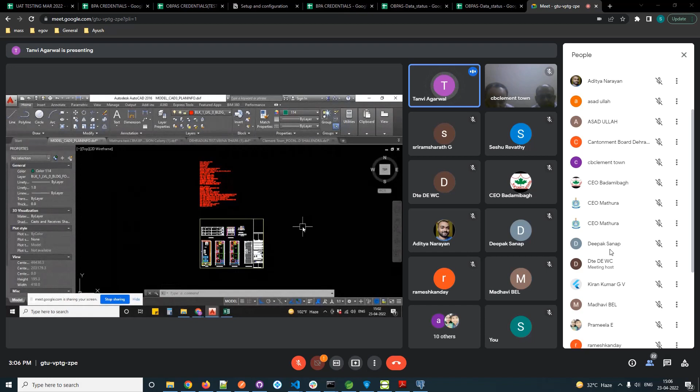They need to show only this much information while they upload their final updated drawing onto the portal. It will have the plan information layer updated as per the specific details of their plot and their particular drawing, in which all the layers which need to be updated as per the given or shared DXF template with them should be there only, and they'll remove anything else in the drawing.

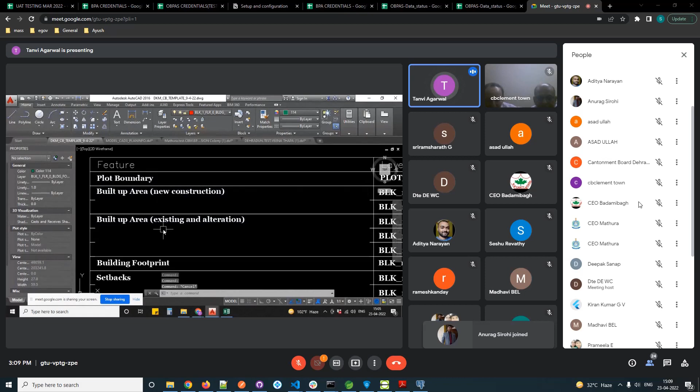So this is the template of layers being shared with the CBs, in which we have different layers, for example plot boundary, built up area, new construction, and built up area which is already existing, or any alterations or deductions in your proposed building, then you'll use these layers. Some are mandatory layers which you have to prepare onto your drawing.

For example, you will take a drawing, whatever drawing you prepared, the method you prepare your drawing would be the same. After you prepare your drawing, you just make sure that all the layers of your drawing are in the zeroth layer. You just make sure. Now onto this layer you will overlap

the new polylines or the rectangles. It should be an enclosed polyline only. For example, if this is the plot boundary, we'll draw it on the site plan. If we'll see here on the site plan, the first layer sequence would be to show the plot boundary onto the site plan.

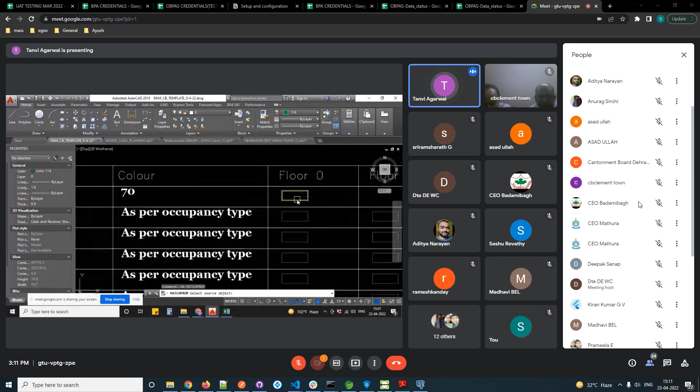Now this is in a layer, it can be any layer. So we'll ensure that we'll make the zero layer as our current layer. We'll draw everything in the zeroth layer. And then we'll match the properties of this layer with our portal layers. So for example, plot boundary, plot underscore boundary is the layer name.

It is in color 70. And for floor 0, that is ground floor, this has already been created for your assistance. You'll just have to match its properties, MA, enter. You'll just have to match its properties with the polyline of the plot boundary you have just created. So now it comes under the layer called plot boundary.

Similarly, we'll make another mandatory layer. This is the mandatory layer. If we'll see in this table, this is the mandatory layer which we have to show in order to get passed through the portal scrutiny itself. If you will not create this layer, the portal will reject the drawing.

Similarly, the other layers, for example the built-up area layers, it is also mandatory to show the built-up area layer, whatever are the deductions, whatever is the new proposed built-up area, whatever is existing, or the demolished part. We have created some separate layers for it. Floor-wise, you have to choose the layers carefully as per the floor.

Now, the next layer after plot boundary would be your built up area and the building footprint. For building footprint, if you see, the layer name is block n level 0 building foot underscore print. So you need to ensure that you are matching the properties of the correct layer with your plan. We have seen some CBs matching it with a different layer, wherein in other layers we have FLR, and in this particular layer we have LVL.

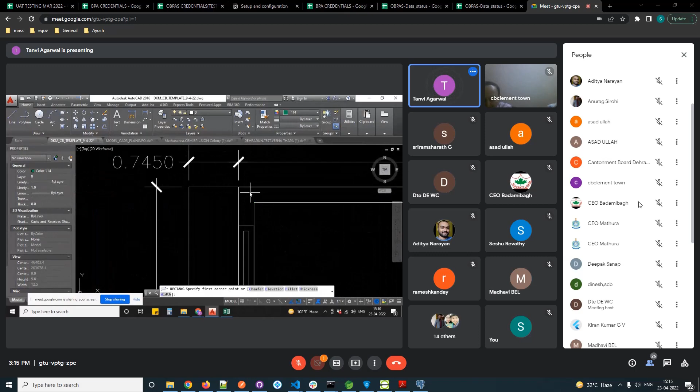Similarly, we have built up area. For built up area, we'll create similar rectangles, and we'll show these on the floor plans itself, because we need to show whatever built up area is there on each floor. So if this is the built up area on ground floor, I need to match it with this layer called block 1 floor 0 built up area, and I will match this layer with this polyline.

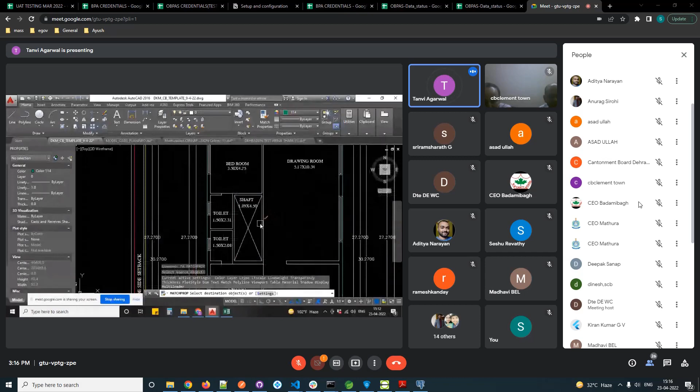Now I need to create the voids or the shafts that I need to deduct from this built up area. There can be multiple voids in the same building block, multiple shafts as well, or open inner courtyards. If we want to deduct them, we'll match its layer with the next layer called block n floor built up area deduct. Because we are working on the ground floor, we'll match it with this layer under floor 0, and we'll match the properties of the polyline of the shaft we just created.

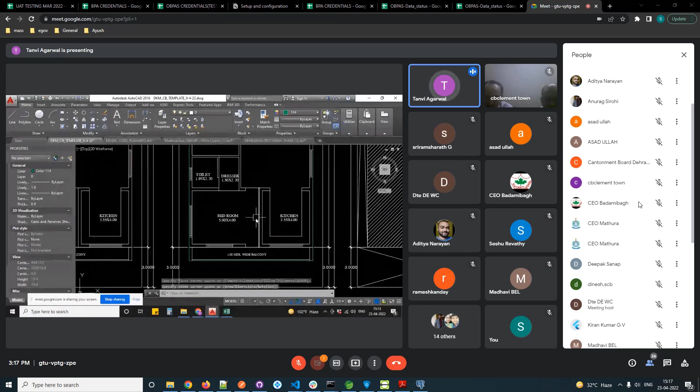Now the outer rectangle we just drew for the total built up area comes under layer block 1 floor 0 built up area - we see this in the properties layer name. The inner void that we created shows in the layer block 1 floor 0 built up area underscore deduct. After creating these two layers, the portal will automatically read the total built up area on the ground floor. Similarly, we will create other closed polylines on other floors, and match its layer properties with floor 1, because now we are working on the first floor plan.

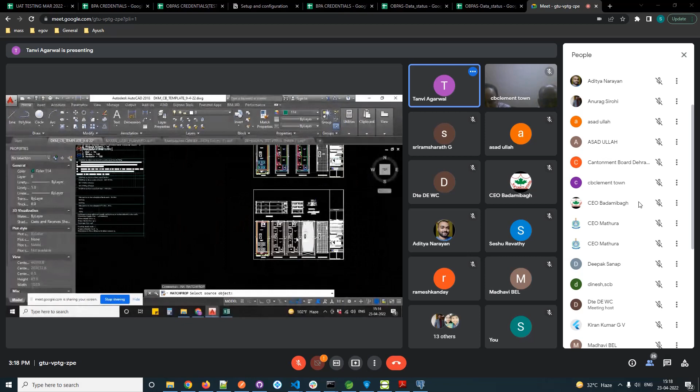Similarly, we'll create the polyline for the shaft, and match the layer for block n floor 1 built up area deduct, matching the deduction layer from the floor 1 column itself, because now we are working on the first floor's built up area. Now this shows under block 1 floor 1 built up area deduct, and this outer rectangle shows under block 1 floor 1 built up area.

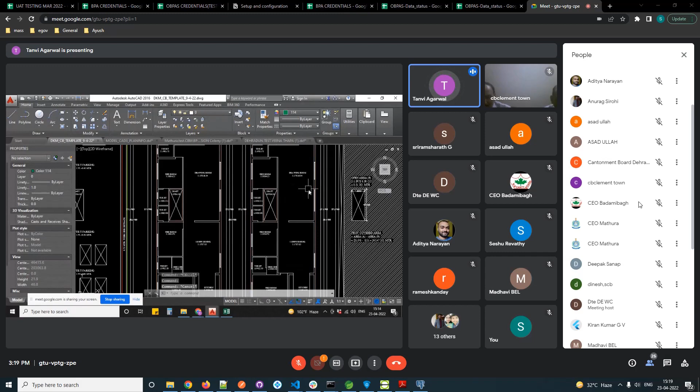So if you are, by chance, showing two separate blocks on the same site, you will create separate layers for the built up area of the different building. For example, this layer says block 1 floor 1 built up area, because it's the first block - only one block we have created on this site, so we use the block 1 layer. If we have another block as well, we'll create a new layer called block 2, floor whatever it is, built up area. This is how we need to create more layers if we are planning to propose more buildings or more floors.

For now, we have already shown the layers for four floors and two basement levels. Mostly in the CBs, we are allowed to have G+2, only 3 floors are allowed generally. So if needed, and as per the CBs, if it is allowed, we need to create more layers and more block layers - we just need to duplicate the layer and change its name.

Okay sir, is there any doubt till now in these 3 layers?

No doubt, sir. Clear, sir. Hello, sir, we're here from Badami Bagh. Hello? Yes, sir. Ma'am, I have something to ask. Yes, sir, please.

Can you please open the drawing from Dehradun area? It's by the name of Veena Thapa, the fourth tab. Yes, sir.

Ma'am, actually first of all I need to ask that the staircase area that I have marked, is it correct or not? So the staircase area you have marked incompletely.

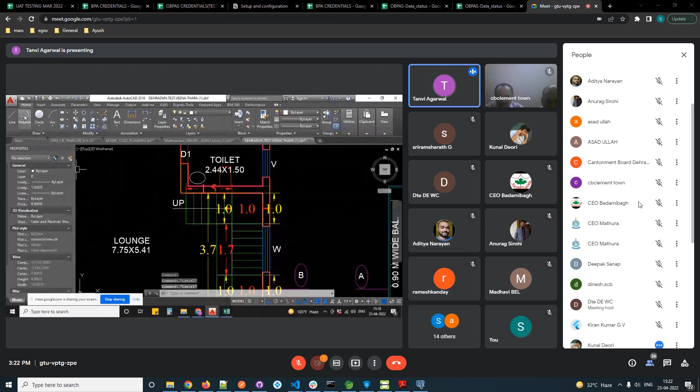So how should I mark it? If you see the last video shared with you, we already discussed how the rectangles should be marked. First of all, the complete area in the polyline of the staircase, we'll mark that. For example, like this, we'll not duplicate any layers, any portal layers. We will not duplicate because it will be counted twice otherwise.

So we'll just mark once this particular layer, and we'll match it with this layer called this block and floor 1 staircase. So if we are working on the ground floor, we'll match it with this layer under floor 0. If we are working on first floor, then we'll match it with floor 1, and so on.

Then the second thing, if you see in this template itself, it explains what you are expected to do with that particular layer. So the polyline showing the staircase area, you need to show in this layer in color 7. In the same layer in color 3, you will show the lines showing the number of risers, which you have shown, I guess. Yes, right.

This is also floor wise. You will show the risers in the floor wise layers. Then in color 2, you will show the dimension with color code 2 as width, and in color code 1, you will show the dimension with color code 1 as length.

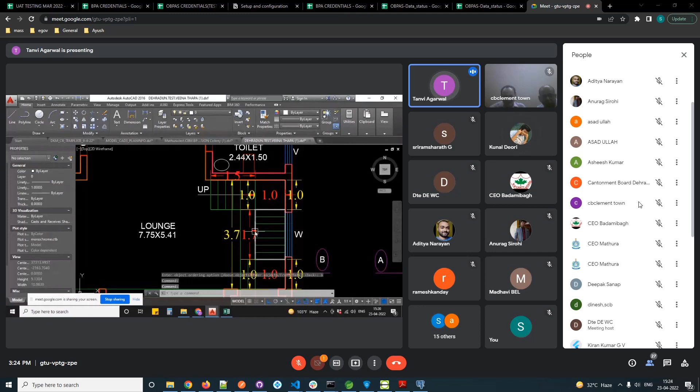The flight, right. Actually, I have also 3 flights in this day. Each flight you need to show the dimension, and each landing you show the dimension in a different layer, as shown over here. Okay.

Also, you need to specify if it is a fire staircase or general staircase. If in your CB's specific bylaws it is mandatory to show a fire staircase in your building, then you will show the same staircase in the same layers under fire staircase layers. Otherwise the portal will show a query that you haven't shown any fire staircase.

So if it is a general staircase only, then you will use this layer format. Otherwise, you will use the fire staircase format if you are willing to show it as a fire staircase. Also in fire staircase, you must have entrance or exit directly to the ground level, like outside the building. Only then it's a fire staircase, right?

So whatever specifications are there for fire staircase, you need to follow it, and you need to create it under these layers of fire staircase only. In case it is a spiral staircase, then you will use this layer to show the outer spiral area of the staircase, just to show that it is a spiral staircase.

And you will just see the comments in the row adjacent to it, circle showing the spiral staircase if applicable as per design. This is not mandatory that you have a spiral staircase in every plan.

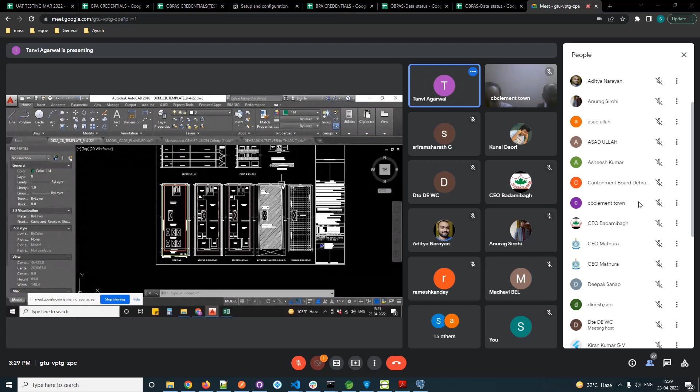We don't have to mark the roof plan. If you mark the roof plan under some other floor level, it will be read as a separate floor. So just keep it in the 0th layer itself, because it will be useful for manual scrutiny later on. For portal scrutiny, there's no need, because CB bylaws don't specify anything about your terrace area, so the portal will not scrutinize the terrace.

One more thing I need to ask — the complete drawing should be in the 0th layer only. The projection which we are taking on ground floor, I have marked it in the chhajja layer, I guess. If it is an accessible projection, then you will mark it in the balcony layer. If it is inaccessible, then in the chhajja layer.

If it's a canopy on the door lintel or anything, if it is accessible, then I have to mark it in the balcony layer. And it will be marked in zero floor only. The ground floor will be marked in zero floor, and the first floor will be marked in floor one, according to the table. So for ground floor, there will be no balcony.

For ground floor, it would be a platform or a chabutra sort of thing, not a balcony. If you are showing a balcony on first floor, you'll show it in the first floor layer, because if you are constructing the balcony on first floor, you will show it on first floor. On ground floor, you will show it if you are showing a chabutra below the balcony.

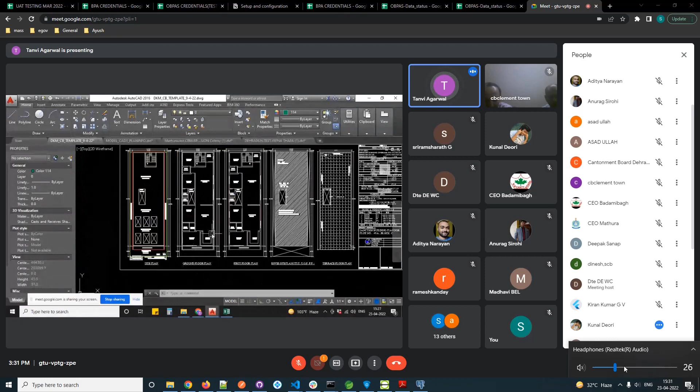The projection does not need to be shown on ground floor. The dotted things, whatever dotted lines we used to show on ground floor, you may mark in the zero layer if you want to. All the dotted things you will mark in the zero layer, but not in the portal.

Got it, thank you. But the portal layers you'll use very specifically, because the layers of the enclosed polylines will be helpful for the portal to count the total area on that floor.

Please explain about how to mark the direction north and match it with the layer.

Sir, in direction north, that needs to be checked manually. So what we were planning was to have a polyline to show the north direction from the CVs, but the portal will not be able to check it manually. So what we thought later on is to drop the portal layer, show it on the zeroth layer, and it would be checked manually later on. Otherwise, you can just show the polyline showing the north.

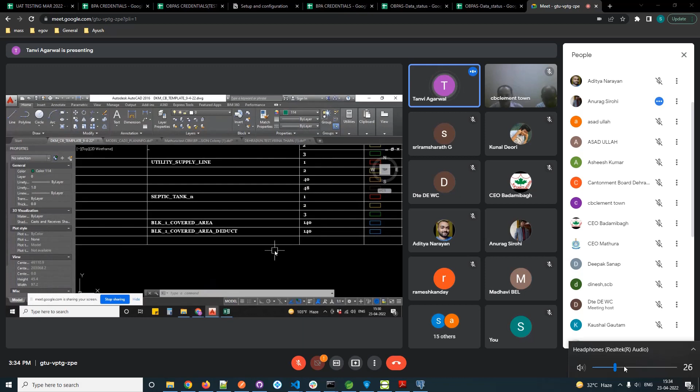Okay, so sir, you'll get a layer called north direction also in the template shared with you, which I'll just share the updated one. So you'll get a layer called north_direction, wherein you can show just the polyline. For example, if this is my north, I can just show a polyline showing the direction of my north like this, and I'll match this with the property of that particular layer, which you'll get now in the updated template.

Okay sir, and ma'am, what about electrical line and plumbing line? So electrical and plumbing, we already have the layers. For example, under utility supply line, we have these lines: electrical supply line, which is mandatory and needs to be shown in color 1; water supply line under color 2; water drain line color 40; and sewerage line color 48. These are the layers, and these you have to show only onto the site plan like this.

In this case, we have found an error point mentioning that the well was not defined in the drawing. So what was that? Well, you don't need to, that is not mandatory. Actually, the wells were from an outdated building bylaw, and it was decided with the CBs in the meeting that we were omitting that particular bylaw. So if you have that, you can show it in the zeroth layer itself. If you don't have it, it's not mandatory to show, because this has been omitted.

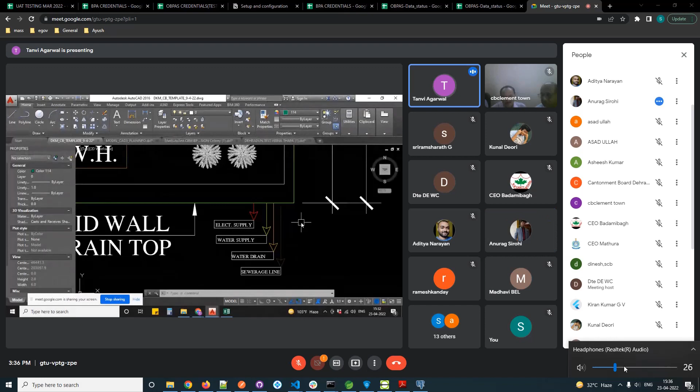Ramp, main gate, boundary walls, these are not given in the latest one. Ramp, because ramps are not being asked for in your CB bylaws, sir. So whatever is applicable as per your CB bylaws and your project, only those layers you need to update your drawings with, along with some mandatory layers, whatever your CB is, whatever your land use is. Only those you need to select.

Tanvi, any other doubts? I have a question. Yeah sure, please go ahead. Can we have this scrutiny verification ourselves?

I didn't get your question, sir. Ourselves, as in?

I have got the application and login details where I can upload the DXF file and view the EDCR report, but I am not able to upload it. It's showing some error.

If it is less than 30 MB, I hope it will not show the error. No, it is less than that and still showing an error by the name 404. Every time I'm uploading the file, it's showing some error.

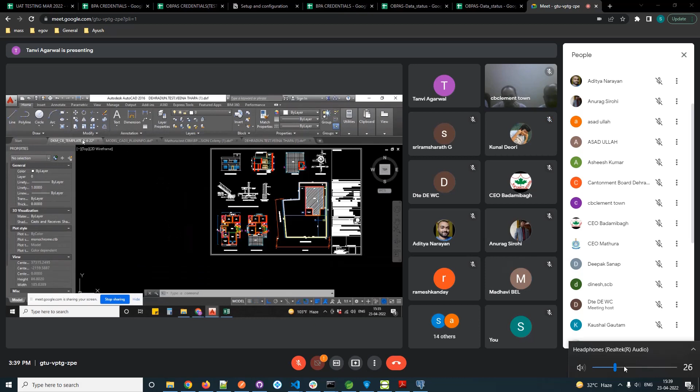Okay, so I hope till these three layers we are clear by now. We have covered the plot boundary layer, built up area layer, and building footprint layer. If we have anything we want to show under existing built up area, we'll show these layers: built up area existing, built up area existing underscore deduct, similarly as we were showing the proposed new built up area and built up area deduct.

Similarly, we'll use this built up area existing and built up area existing deduct layer. In case we are demolishing some part of already existing built up area, we'll show it in this last particular layer, floor wise itself.

Then the fourth layer comes setback, which is again a mandatory layer, and as per your CB bylaws, whatever minimum setbacks are specified, you will follow them only. All four side setbacks need to be shown onto your drawings.

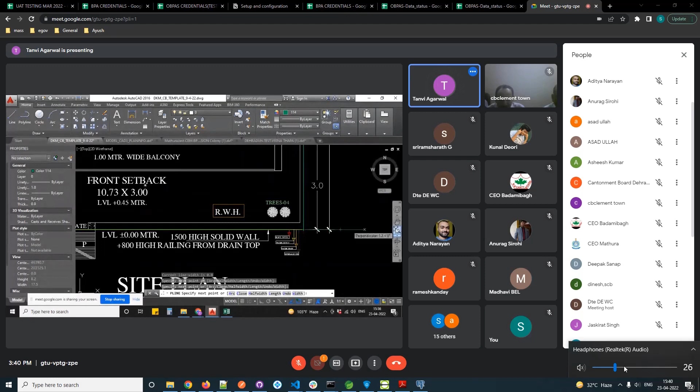For example, for front setback, we'll take the rectangle, or else we'll take the polyline and create an enclosed polyline. One thing: while creating the setback, we need to ensure that it touches one side to our plot boundary and the other side to our building footprint layer.

Only then it will be able to capture the correct setback area. So this enclosed polyline is touching the building footprint layer on one side and the plot boundary layer on the other side, so now it will take the correct area of the front setback.

Now we'll match its properties with the front setback layer, which is shown in color yellow, color 2.

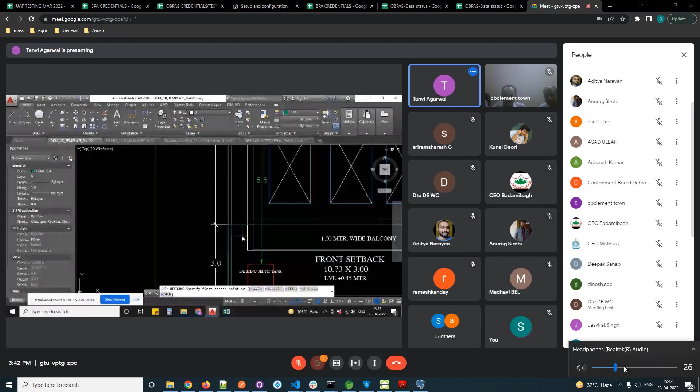Another rectangle will be created for the side setback or rear setback and for side 2 setback, and we'll match it with the respective setback layers. For front setback we have this yellow one.

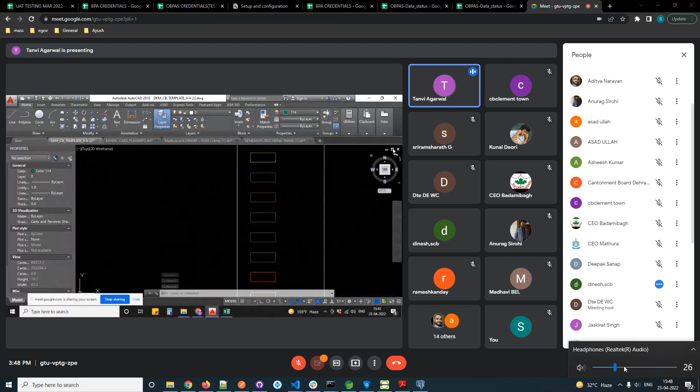I'll go to the layer properties. If it is block 2, then I'll create a separate layer and the name would be block 2 floor 0 built-up area. So in that manner, I have to create new layers on the basis of these already created layers for the floor.

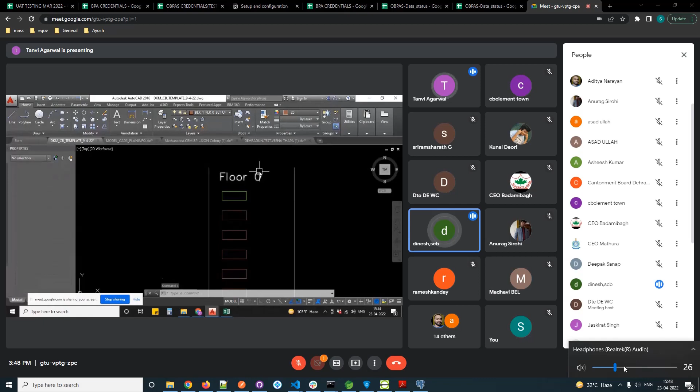We can change the color of that block. You can change the color, but you'll have to maintain the color specified in this table. That is why the color is being specified over here, so that by mistake you don't change it.

For example, if the portal takes it in color 1 and you change the color of this layer to some other color, the portal will not accept it. So that is why the color is being written over here, to ensure that this particular color is the color of the layer which is desired by the portal.

That means every polyline has to be closed, or else it would not take the area. If it is not an enclosed polyline, the portal will not read the area.

Madam, in our cantonment board, stilt floor is also allowed actually. There is a separate layer for stilt floor, madam. So, sir, stilt you will create in floor 0 only. Stilt you will create in floor 0, and the floor above the stilt you will create in floor 1.

You can create it separately, the portal reads it that way. That is only for car parking purpose, madam - no issues, sir, that is exempted. But the portal reads it, that layer is exempted in the FSI.

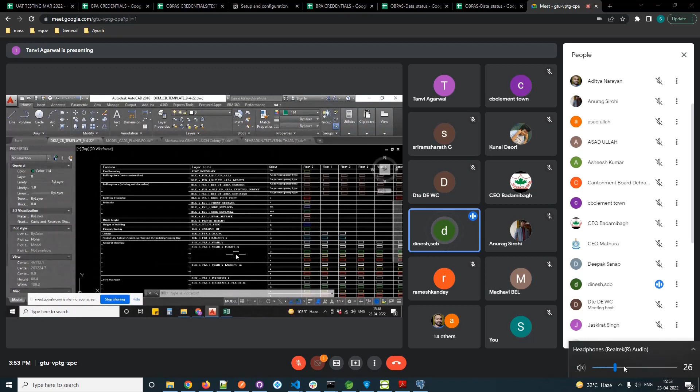Okay, madam. One more point, madam. In the first floor area, there will be projections, that means balcony projections. In the ground floor, there won't be any projections. That means in the ground floor, on one particular area, if there is a setback of 5 feet, and if it comes to the first floor, there will be a 3 feet balcony projection available. At that area, only 2 feet setback remains - that means 2 feet running space only, open to sky only, madam.

Then what should be the setback? So let me tell you, in the site plan, we'll show the total setback area from the plot boundary line on one side to the building footprint line on the other side. So it will touch the building footprint. If the balcony is on the upper floor, you have shown it in the 0th layer only, so the portal will not read it.

So balcony in the site plan, you're showing it in the 0th layer. Then on the site plan, you will show building footprint, plot boundary, and the setback line, overlapping the building footprint line and the plot boundary line. So this will create your front setback or all the setbacks like this only. That means the balcony comes, and the setbacks available in the ground floor are only reflected for first, second, and the remaining floors. So you are telling the same, madam?

Sorry sir, what are you saying? Can you please repeat? The setbacks available in the ground floor only reflect in the first floor and second floor - are you telling that, madam? That means if the setback in the ground floor is 5 feet, the setback will be shown only on the site plan, not on the floor plan. So for the first floor and second floor, we don't have any setback criteria, right? We have the setback criteria in the site plan itself, right?

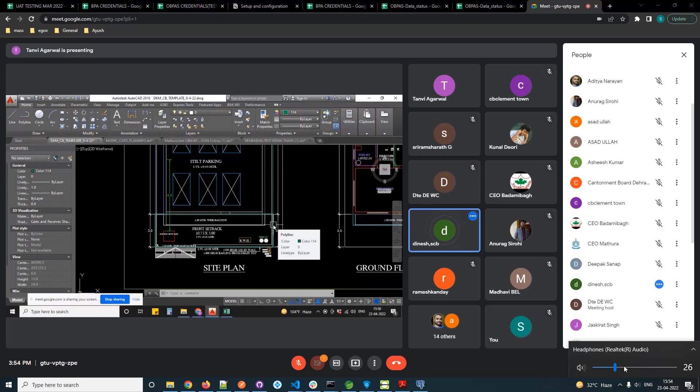Alright, if in case we have the balcony, we'll show it on the first floor if we have the balcony or any projection. If we have an accessible projection, we'll create it under the layer called floor 1 balcony.

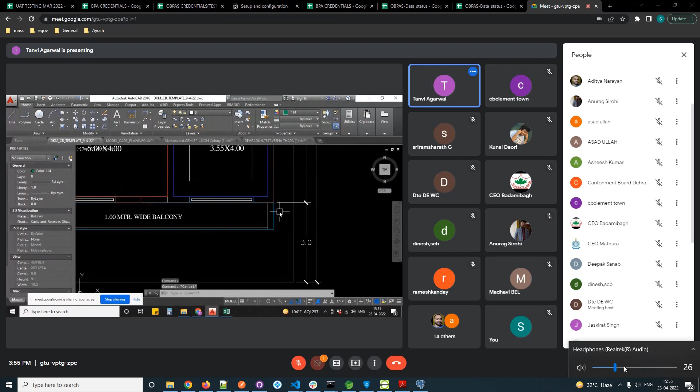If it is an inaccessible projection, we'll show it under the layer called chhajja, block N floor I chhajja. If it is accessible, then block N floor I balcony. So on the first floor, if we have the balcony, we'll show it on the first floor plan itself. On ground floor, we'll show it only if we have any plinth or chabutra just below the balcony, and only if we are building anything on the ground floor. Whatever built up is there on whichever floor, we'll use the layer of that floor only, so we'll not create the layer twice for the single balcony.

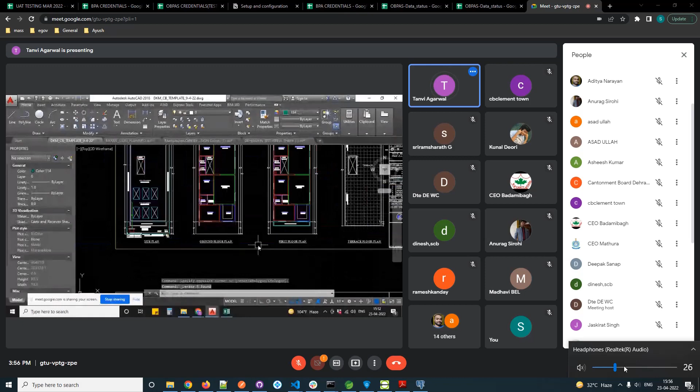If we have just one balcony on the first floor, we'll just show the balcony on first floor itself. So here we have the layer called block 1 floor 1 balcony 1. On ground floor, because we have the chabutra within the setback, here we are saying block 1 floor 0 balcony 1. If we are not having any chabutra or plinth on the ground floor, we will not show this layer on the ground floor, we'll just show it on the first floor like this.

Okay sir. Have I answered your question, ma'am? Yes sir. Any further doubt on this, madam?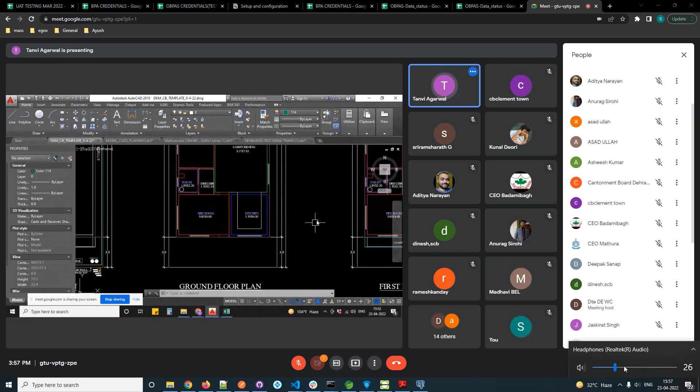Generally, we show the dotted line for balcony projection on the ground floor, madam. Is that possible? Dotted line we can show under the 0th layer, but not on the portal layers. Because anything in the 0th layer you want to show, you can show it, it will be checked manually. But in the portal layer, if you show it twice on the drawing, it will be counted twice. Okay, understood, madam.

So staircase we have already talked about. If there is any doubt in staircase till now, you may please let me know. So we have covered till now plot boundary, built up area, building footprint, setbacks, chhajja projection, balcony, and the staircase.

Now the plinth height. To show the plinth height, we have a separate layer in color 7. To show the building height, we have a separate layer in color 5. And to show the parapet height, we have a separate layer in color 3. In the elevation or the section, we'll show them just one single time, we'll not show it again and again, otherwise the portal will read it twice or thrice. So this particular layer, block 1 height of the building, the total height of the building will be shown in this particular layer.

Then here we have the floor height layer, block 1 floor 0 floor height. So for each floor we have defined a different layer. Block 1 floor 1 floor height is this, and this is a different layer, block 1 floor 2 floor height. So the color would be the same, but the layer would be different.

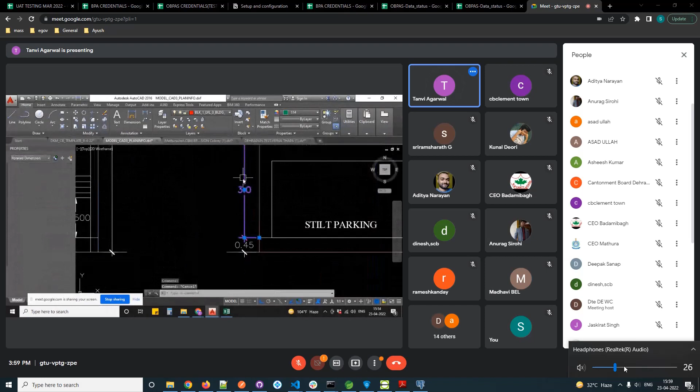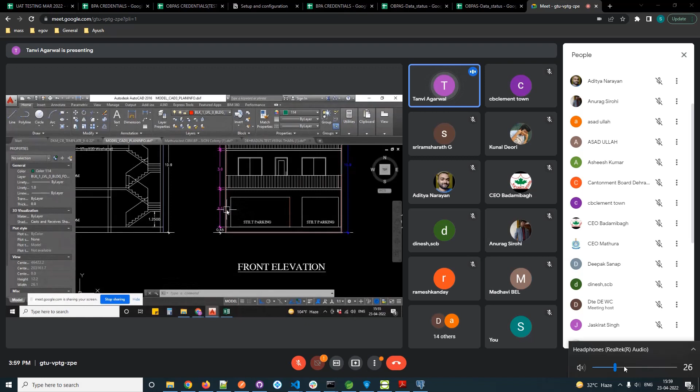In this particular layer, we need to show the clear height of the floor from the floor finish to the bottom of ceiling, so that it will validate that particular bylaw wherein the height of your room should be minimum 3 meters or whatever that bylaw says. So you will mark the dimension to show the clear height floor wise, selecting block 1 floor 0 floor height, then block 1 floor 1 floor height, then block 1 floor 2 floor height, showing the clear floor height from floor finish to bottom of ceiling.

Okay sir. And along with the staircase, we'll mark floor height M equal to whatever is the height of the floor, from floor finish of the lower floor to the floor finish of the upper floor, landing of the lower floor to the landing of the upper floor. Okay sir, so this would be different.

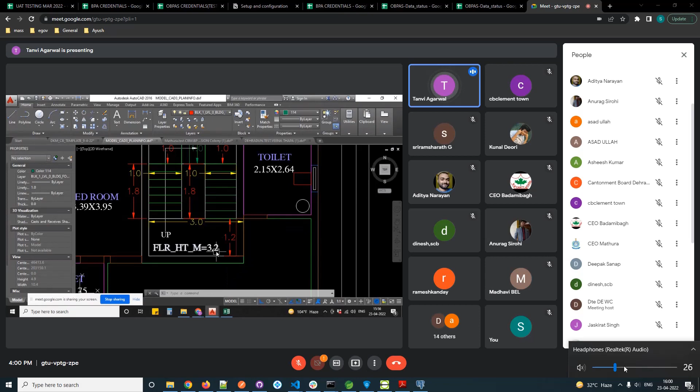The floor height underscore M over here means the dimension in meters. So we'll have to write the total floor finish to floor finish height over here in meters. So this would be 3.2 for example here, and this clear height would be 3 meters only, because this is from floor finish to the bottom of the ceiling, and that is from floor finish to floor finish of the 2 subsequent floors.

Right madam? Sorry, staircase headroom, madam. You have to show on terrace floor staircase headroom height, overhead tank height, and lift room height.

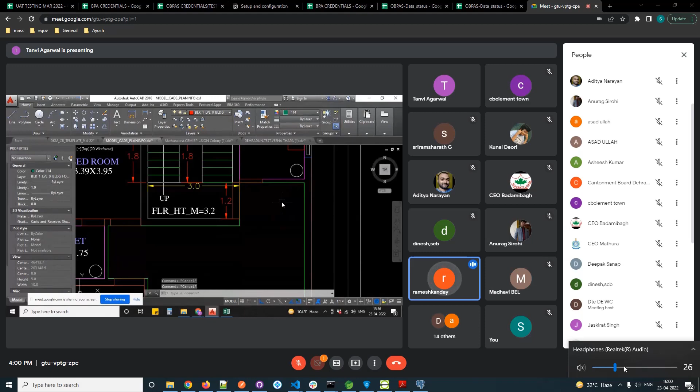Sir, can you show headroom in the staircase, please? So, headroom actually is not being specified in the CB bylaws. So that can be checked manually onto your drawing. You can show it in the 0th layer only. Okay, madam. Right, okay, sir.

So whatever is applicable as per your bylaws only, that you need to show into these defined layers. Otherwise, all the other information you want to show, you can show it in the 0th layer to be checked manually further. Okay, so any doubt till now? We have covered all the layers till the staircase till now.

Floor height we have already covered over here. So whatever floor height we are showing in the elevation or the section, that would be the clear floor height, and the layer will be different, but the color would be the same.

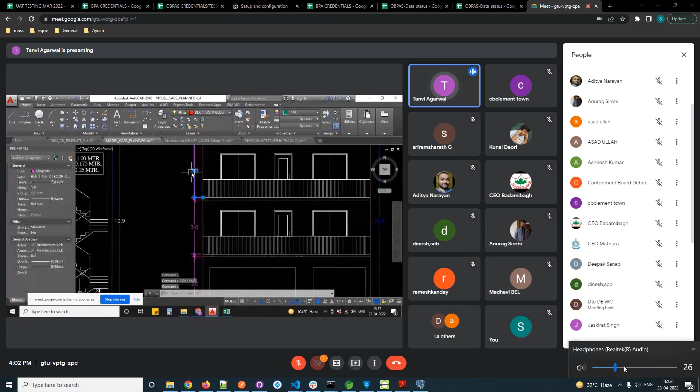Along with the staircase, we'll show the floor finish to floor finish height, and that would be in the layer block 1, floor 0, stair 1 itself, the same layer where we are preparing the polyline for the staircase. The layer name is block N, floor I, stair K, whatever staircase it is, and the polyline goes in this layer. We'll show the M text like this, simply writing FLR_HT_M equals whatever is the floor finish to floor finish height in meters.

Okay, then moving on to the next layer, we have the habitable rooms. In habitable room, the layer name is block N, floor I, regular room. In the regular room, we have specific colors as per the type of room. If it is a simple bedroom, we'll show it in color 1. If it is a bedroom with attached bathroom, color 2. Drawing room, color 3. If it's a toilet or bathroom, color 6.

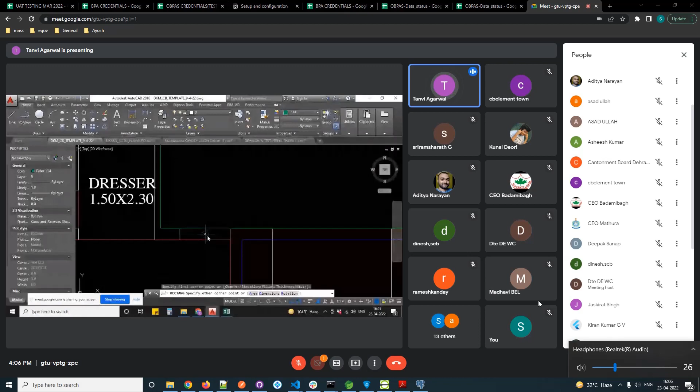For whatever floor plan we are working on, we need to work accordingly. For example, if I want to show the door, I'll go to the ground floor plan, take this rectangle, show the door opening, and match the door layer on the ground floor with this. Now it comes under block 1, floor 0, light ventilation, and the color already specifies that it is under the door layer.

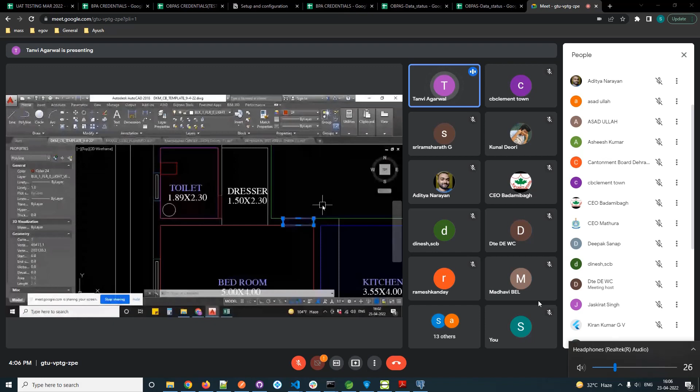Similarly, for windows, I'll mark another polyline to show it, and the portal itself will read the width of the window like this. I'll now match it with the layer on the ground floor for windows. Like this, for all the windows on the same floor.

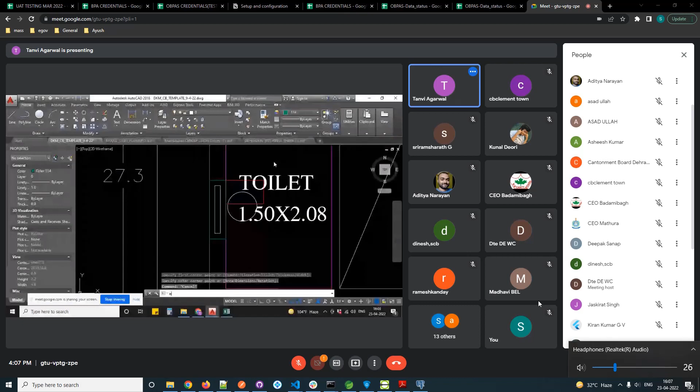Now for the ventilators, I'll similarly draw the polyline like this for all the ventilators on the same floor, and I'll match the layer of ventilator, which is color 150, with the polyline I just created for all the ventilators. So this is how openings will be created.

So, habitable room and openings, I hope it is clear. If it is not, you may please ask the doubt.

Okay, so is it clear, sir? Yes, ma'am. Madam, drawing with the interior specified color. If you draw with that specified color given by you, will the area be taken automatically, madam, in the portal? Or do we have to type that area? The portal will read it automatically.

If you will create it in the correct layer under the correct color, the portal will read it automatically. That means we have to first select the layer, and later we have to draw that one, like that, madam?

First, you have to draw the polyline onto your plan, and all the polylines will overlap each other. All the polylines will overlap your already prepared drawing in the 0th layer. For all these portal layers, you will overlap new rectangles or new polylines over it, and you will match the property of the desired layer as per the portal template.

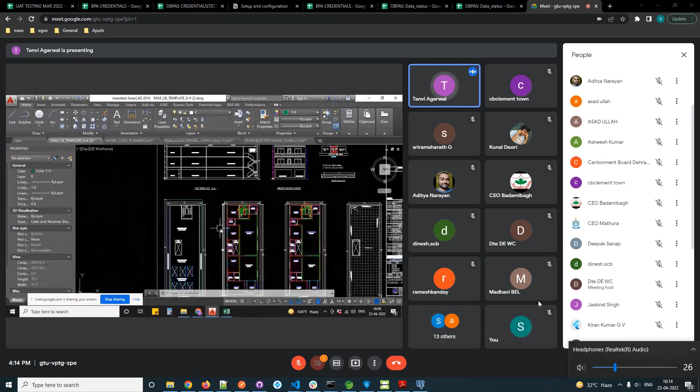Then the wash basin, WC, urinals, bath and toilets - these we need to show as polylines as per the specified colors over here. For example, for WCs, we have marked this kind of polyline.

If you see the name of the layer in the properties, it's block 1, floor 0, water closet. So all the WCs will be on the same floor, on the same layer, like this. Then if I select the wash basins, all the wash basins on the same floor will be on the same layer.

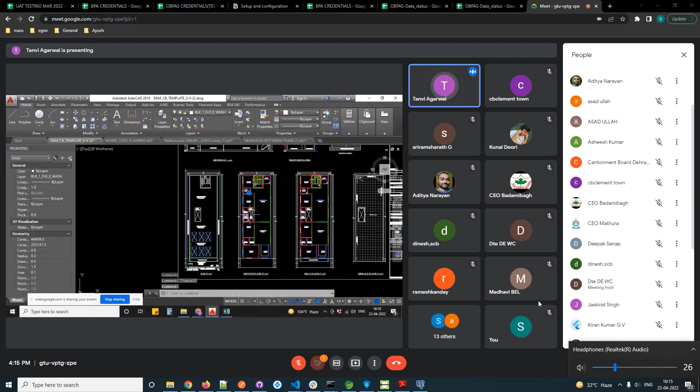Or all the wash basins of the same type will be on the same layer. If we have different types of wash basins or sanitary fixtures, then we have different layers for each type. Generally we have a similar type of WC or wash basin, so we draw all those similar type sanitary fixtures onto a similar layer for a single floor. So all wash basins on this floor are in the same layer, same color. All WCs on this floor, same layer, same color.

Similarly, we have another layer called urinal. If you are proposing any urinals, you can use this layer.

For bathrooms and toilets, we just want to have the dimension to show height of the bathroom, BATH 1, and dimension to show height of the toilet, TOI 1. For example, if your bathroom and WCs are attached, then you will show it under the toilet layer. Or if it is just a separate bathroom area, then you will show it under this particular layer. The dimension would be shown under this particular layer.

After this, we will show the utility supply lines. I have already told you we have this layer with 4 different colors. Color 1 will be used to show electric supply line, color 2 for water supply line, color 40 for water drain line and sewerage line. For sewerage line, color 48 will be used, and this will be shown in the site plan itself.

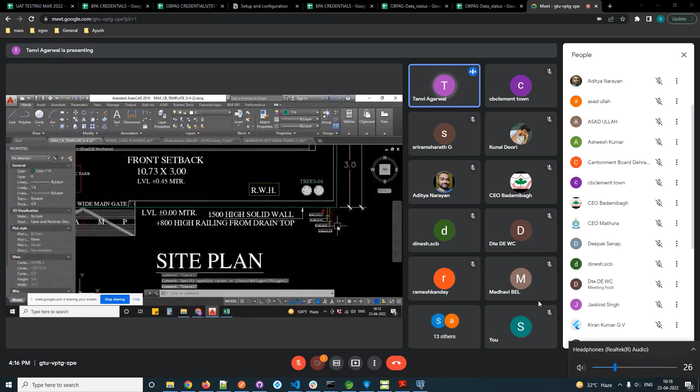I have just shown symbolically how you will show the lines, and the movement, for example if it's a water supply line, whatever the movement would be as applicable to your proposed project, you will show it as the whole polyline in this particular name and color.

Then similarly, septic tank. This layer we have is septic_tank_n. In color 1, we'll show existing septic tank onto the site plan itself. In the same layer, color 2 will show proposed septic tank. And in color 3, we'll show the dimension to the water source of that septic tank.

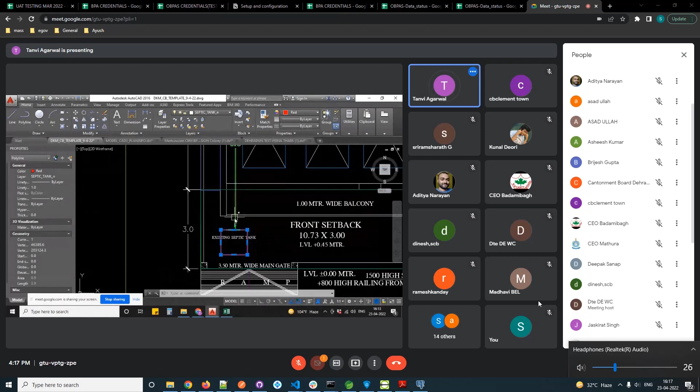So in this site plan, I have shown this polyline as the septic tank, and because it is in red color, this is the existing septic tank. In the same layer, in green color, we are showing the distance from the water source, like this.

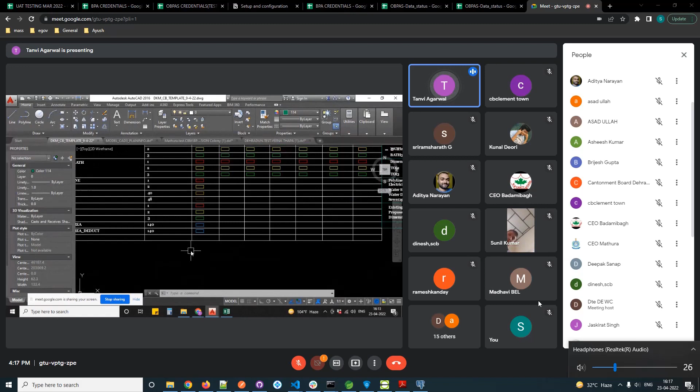Also, if your CB bylaws specify anything about the ground coverage area, then you will show that as well, under block 1 covered area, block 1 covered area deduct, in the similar manner we used for our built up area layers. So we'll create our ground coverage area as well, if applicable as per our specific bylaws. This layer is for the ground floor only, because the ground coverage area will show only on the ground floor. And the built up area layer we were showing on each floor, the built up area on each floor.

So these are the layers which you are supposed to overlap your drawings with, so that our portal can read them. Any doubts till now, you may please tell me.

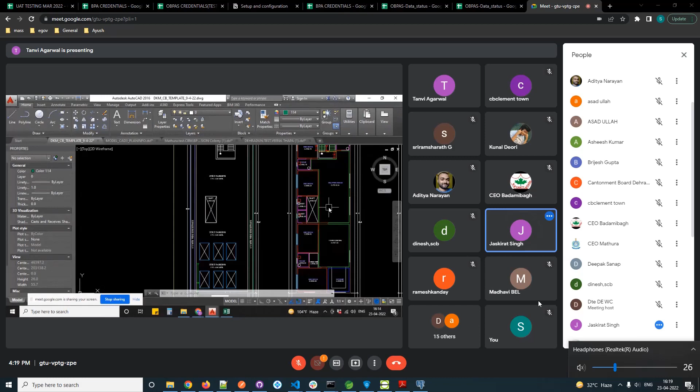Excuse me ma'am, I want to ask, you told me to mark the height of the toilet. Supposing in my section the height of the toilet is not given, then where should I mark it? So in the section, for example, you'll show a section through the toilets or staircase, and there only you can mark the dimension. Supposing my section is not through the toilet, then? If you're saying your section is not through the toilets...

Yes ma'am. So if your specific bylaws say something about the minimum height of your washroom or minimum height of your toilet, then only you need to show it. Otherwise it's not mandatory for that case. Thank you ma'am. Otherwise, if the bylaws specifically say about that, you need to show a section through the toilets and then mark the dimension.

Excuse me ma'am. Yes sir. I am from Badamibagh, ma'am. Yes sir. In which layer do we have to show elevation, section and all that?

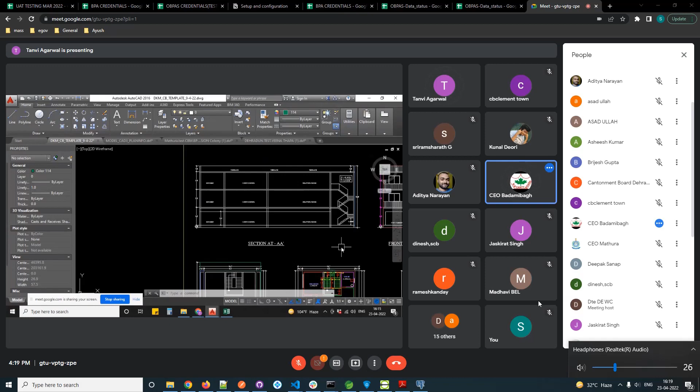So by default, your elevation and section you will copy in the 0th layer. And then, for example, building 1, block 1, height of building, and this parapet height, and these floor heights, in which we are showing the clear height of each of the floors — only these layers need to be updated in your elevation or your section just once in a single drawing, just once.

We have all other information of elevation and section there in the 0th layer itself. Any other doubts, sir?

Ma'am, what will be the unit and scale of our drawings? So metric unit is the default unit, and scale will always be 1:1.

And this is very important, that you all ensure these two things are followed: the scale of the drawing is 1:1 and the unit is metric.

If in case you are drawing in feet and inches as well, you can show it like this, where you can mark both dimensions. Let me select this, so it shows...

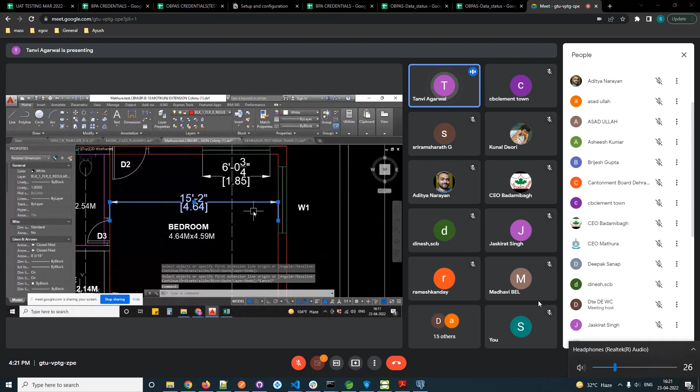The dimension written here is 4.64 meters, and the dimension shown here is fine. Even if your drawing is in feet and inches, as long as the scale is 1:1, this will work, because the portal will read the correct area as 4.64 meters, even if you have drawn your drawing in feet and inches itself.

Okay, sir? Yes, ma'am. Yes, sir. So now I hope all the doubts are cleared. If there is any further doubt, you may please let me know.

So now we'll see some of the common mistakes found in some files till now. Keeping the reference table in the drawing is one such mistake, so remove this before uploading to the portal.

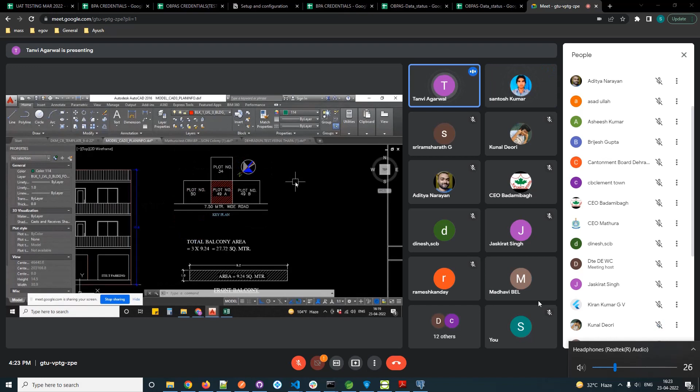So for that it will show an error. For north direction, we'll create one more layer and update it. For other layers, for example ramp, he's saying some other things which are not being asked by their CB bylaws, we'll not use that layer on the portal, right?

Yeah, so sir, you belong to Mathura, right?

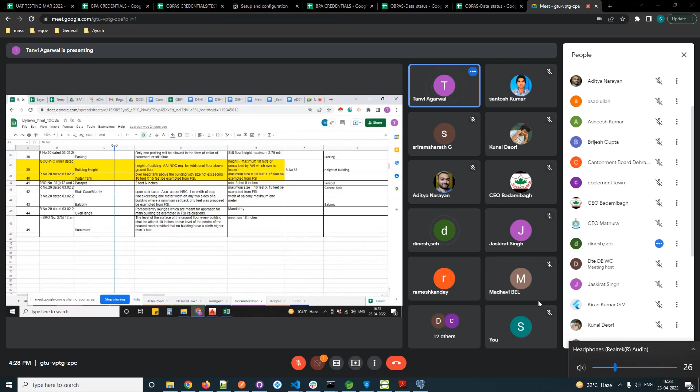That means we are following this problem, yes. So you can show it onto the zeroth layer itself because the CB bylaws till now in the notified bylaws it is not written. So we have not provided a separate layer for that section.

That section details and the foundation section details should be shown in the zeroth layer, you mentioned. That means zeroth layer means the drawing can be directly dumped from another AutoCAD file, that is the meaning of zeroth layer, madam.

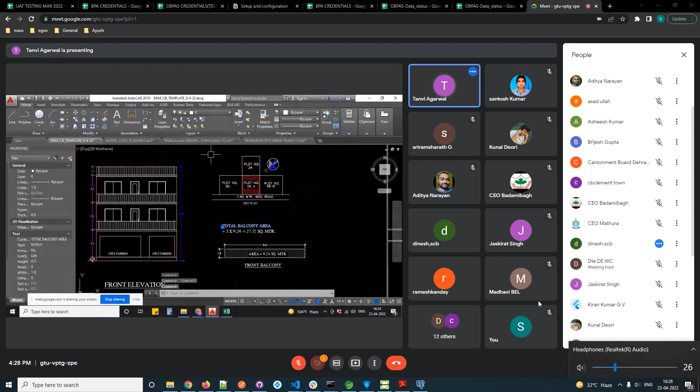No, it's the zero layer. For example, if I select this layer, it says the layer name is 0 - the default layer of AutoCAD. In that layer, you can show any additional information. Whatever information you are not getting in these layers, you can show it onto the 0 layer, which would be checked later on manually.

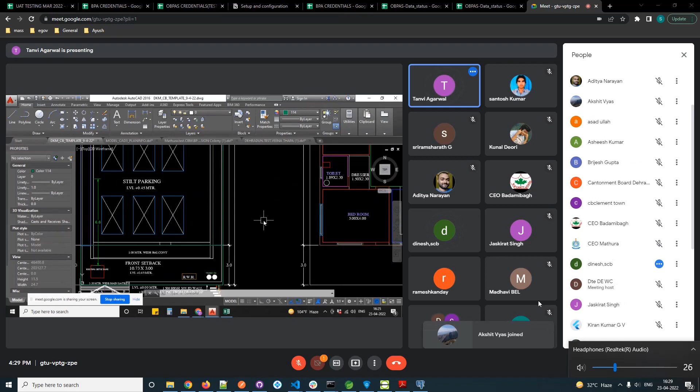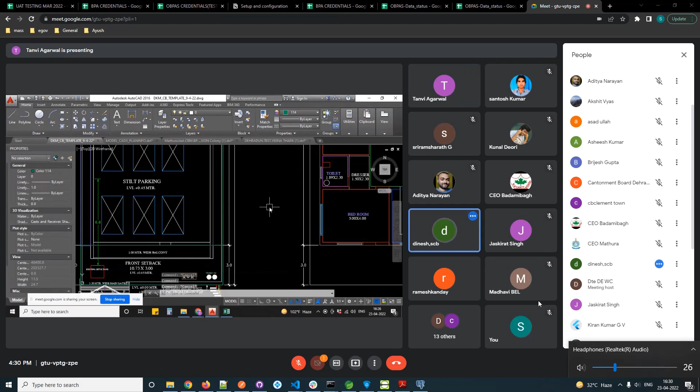Water harvesting pit is compulsory, madam, that is all over India, and they are following the water harvesting pit symbol. Actually, that layer would be added once the bylaws are notified for water harvesting pit, because till now those bylaws don't validate it. That is why we are not providing it, because if somebody says it is not written in the bylaws to provide a harvesting pit, on that basis we cannot reject the drawing. So the online portal will accept the drawing, but manually it would be checked in the CB. If they are checking it right now, they will keep checking it later on as well, but it will not get rejected in absence of that pit. That is why the layer is not being created. As the CB bylaws get updated with time, we will update the layer itself. Madam, so every layer is only created for notified CB bylaws.

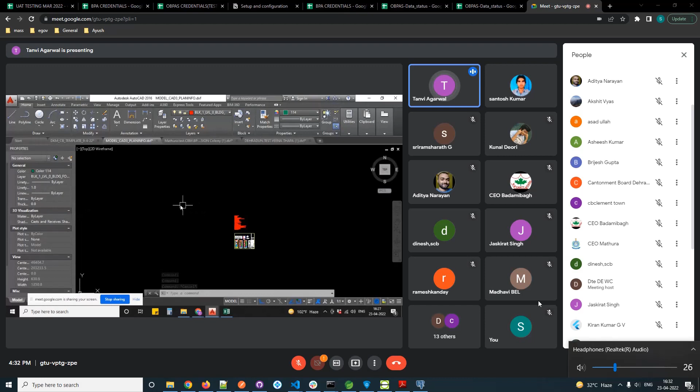So these were some common things. What you need to ensure is that you will delete this template after creating your drawing. After creating your drawing, you will only upload this plan info layer fully filled as per your project specification, and your drawing updated with the template layers, and you will delete that template table from the layer. Nothing else other than these two things, your drawing and plan info, should be there in your drawing.

You will save it in the DXF format, and then you will upload it, ensuring that the size is less than 30 MB. This is one mistake which was being found. Then plan info should be properly filled. It should not contain any less-than or greater-than symbol. For example, in the plan info layer, when you update it, you'll write, for example, 10.7 if the plot width is 10.7 meters, without any such signs which are being shown in the template.

So you'll not show those signs, you'll just write the number whatever it is, like this only. If it is asking you a yes or no question, you will just delete the other part, whether it's yes or no, and keep only the applicable one. If it is a no, you'll delete the yes and just say no. That's it. So no other symbols would be accepted by the portal.

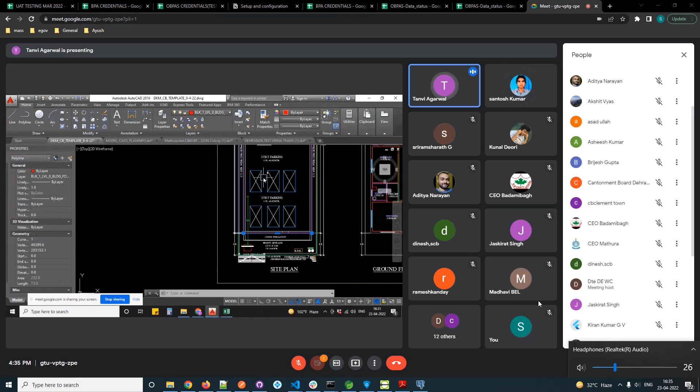ठीक है सर, और ग्राउंड कवरेज जब हम शो करेंगे तो वो ग्राउंड फ्लोर प्लान फ्लोर 0 में शो करेंगे, और इसकी लेयर्स होंगी ब्लॉक 1 कवर्ड एरिया, और उसमें अगर अंदर कोई डिडक्शंस हैं टोटल कवर्ड एरिया में से तो वो हम इसमें शो करेंगे, सो दैट जो टोटल ग्राउंड कवरेज का एरिया है वो पोर्टल रीड करेगा।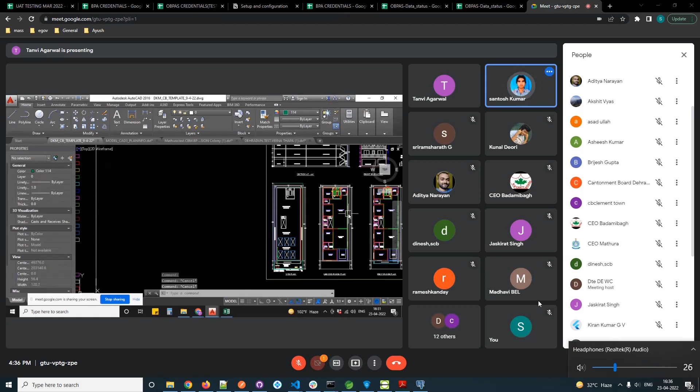मैम एक और क्वेरी थी मेरी, सपोज एक ही ब्लॉक है जैसे कि प्लॉट एरिया, कोई अदर ब्लॉक नहीं है मेरे पास, तो एरर में ये शो कर रहा है कि आपने दूसरा वो नहीं दिखाया है। हाँ, सो दैट इज नॉट मैंडेटरी, अगर आपका दूसरा है - अच्छा मैं इसको भी लिख लेती हूँ, विल चेक इट। हाँ एरर में शो कर रहा है मैम, अदर ब्लॉक इज नॉट मैंडेटरी, ये जो मैंने आपको बताए हैं ये सारे एरर हैं मेरे पास।

ठीक है Sir, whenever you are seeing such errors, if you feel that is the right one, you can please comment on the document or that Excel sheet whatever we have shared, so that we can discuss and we can correct it.

ठीक है सर। क्या मैम ये जो सॉफ्टवेयर है जिससे आप चेकआउट करते हैं, वो हमें अरेंज करा दिया जाएगा? सर ये तो ऑटो कैड है जिस पे मैं अभी आपको बता रही हूँ। नहीं, आप ये ड्रॉ कर रहे हैं जिससे आप चेक करते हैं इस ड्राइंग को? नहीं, वो तो सर कोडिंग होती है एक्चुअली, वो सॉफ्टवेयर नहीं है, वो कोडिंग होती है।

हेलो मैम, can you please share this updated template with us? हाँ हाँ सर, दिस विल बी शेयर्ड विद यू आफ्टर दिस मीटिंग। Okay, thank you.

एक लास्ट क्वेश्चन है मेरा, मैम क्या कोई कंप्लीट फाइल है जो आपके पास रेडी हो जिससे हमें हेल्प करने में और ज़्यादा आसानी होगी, कुछ चीज़ें रह जाती हैं सर। एक मॉडल इंफॉर्मेशन, एक मॉडल ड्राइंग शेयर कर दूंगी साथ में, तो आप इसमें देख पाएंगे कि कौन सी लेयर कहाँ पे हम शो कर रहे हैं, और जैसे इसमें प्लान इन्फो लेयर भी होगी, ये एक रेफरेंस ड्राइंग है जिसे आप रेफर कर सकते हैं, विदाउट ऑब्जेक्शन ऐसी फाइल एक सेट कर दीजिए मैम जिसमें कोई एरर ना हो। हाँ जी, ये विदाउट ऑब्जेक्शन फाइल है, इसमें कोई एरर नहीं है।

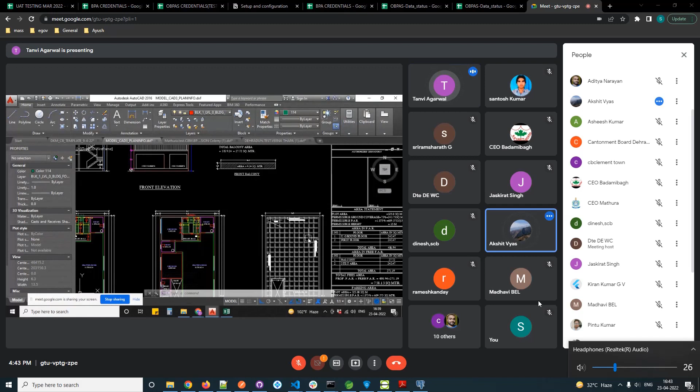ठीक है, अब जो फर्स्ट फ्लोर का प्लान है उस पे जो स्टेयर केस दिख रहा है, हमारे फर्स्ट फ्लोर से ऊपर वो कवर है, मतलब स्टेयर्स नहीं जा रही, तो उसमें भी सेम लेयर ऐड होगी या ब्लॉक 1 फ्लोर 1 की लेयर ऐड होगी? नहीं कुछ ऐड नहीं होगा क्योंकि उसके ऊपर जा ही नहीं रहा, उसके ऊपर ममटी बनेगा। स्टेयरकेस और लैंडिंग तो जा नहीं रही है। तो यू विल शो ओनली ऑन दीज टू फ्लोर्स, ग्राउंड फ्लोर और फर्स्ट फ्लोर पे दिखाएंगे जहां तक आपका स्टेयरकेस जा रहा है।

और मैम कवरेज एरिया फॉर ब्लॉक 1 नॉट प्रोवाइडेड, तो जो आपने टेम्पलेट कवरेज भेजी थी उसमें कवरेज एरिया मतलब ग्राउंड कवरेज, जो ये एक लेयर है, अगर ये आपके कैंट बायलॉज के अकॉर्डिंग आपका ग्राउंड कवरेज एरिया का कोई स्पेसिफिकेशन दिया हुआ है तो आप इस लेयर को यूज करेंगे, ब्लॉक 1 कवर्ड एरिया, ब्लॉक 1 कवर्ड एरिया डिडक्ट, और ये सिर्फ आप ग्राउंड फ्लोर पे बनाएंगे अंडर कलर 140। अगर ग्राउंड कवरेज एरिया के बारे में आपका सीबी कोई बायलॉ स्पेसिफाई कर रहा है तो, और जो बायलॉज टेम्पलेट हमारे साथ शेयर हुआ था उस पे है नहीं ये कवरेज एरिया लिखा हुआ।

आप सर कौन से सीबी से हैं? खासियोर से मैम। तो खासियोर में ग्राउंड कवरेज कितना अलाउड है सर यहाँ? ग्राउंड कवरेज बायलॉज में मैम ऐसा कुछ नहीं है। नहीं है ना, दैट इज वाई आपके साथ जो शेयर हुआ है उसमें ये वाली लेयर नहीं थी, ये तब एप्लीकेबल है जब आपके बायलॉज में वो स्पेसिफिकली पूछा गया है, और आपका जो ग्राउंड कवरेज आएगा वो यहाँ से आ जाएगा, जो आप बिल्टअप एरिया की लेयर में शो करेंगे ना।

बिल्टअप एरिया यस, और बिल्टअप एरिया डिडक्ट में ग्राउंड फ्लोर पे जो पार्ट शो करेंगे तो वो आपका सेम ग्राउंड कवरेज ही तो है ना सर? सेम ही है ग्राउंड कवरेज। यहाँ से पोर्टल यहीं से लेगा, बिल्टअप एरिया में से वो ग्राउंड कवरेज लेगा। लेकिन जिन सीबीज के लिए अलग से स्पेसिफाई किया गया है ग्राउंड कवरेज एरिया कि वो मिनिमम इतना होना चाहिए या मैक्सिमम इतना परमिसिबल है, तो उन सीबीज के लिए उन्हें इस लेयर में एडिशनली शो करना पड़ेगा।

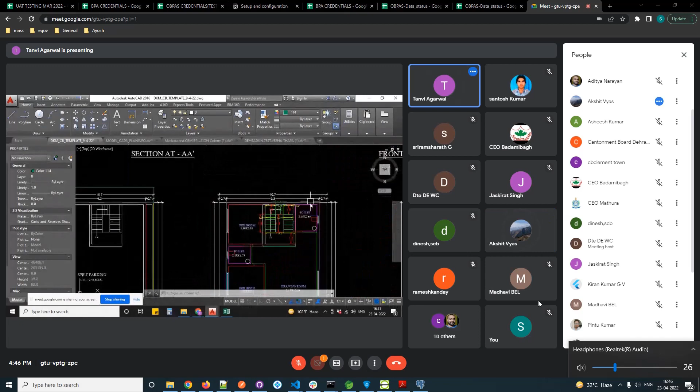एंड मैम फायर स्टेयर्स आर नॉट डिफाइंड इन द प्लान, ये भी ऑब्जर्वेशन लगी है, तो फायर स्टेयर्स का भी हमारे बायलॉज में कुछ नहीं है। वही मैंने बताया कि अगर आपके बायलॉज में फायर स्टेयरकेस मैंडेटरी है, जैसे एक जगह बायलॉज में आपका खासियोल है ना सर? खासियोल मैम, एक मिनट दीजिए मुझे।

So bylaw number 8 says general and fire stairs. हाँ, सो फायर स्टेयरकेस के विड्थ के बारे में स्पेसिफाई कर रहे हैं ना सर आपका बायलॉ, कि फायर स्टेयरकेस की विड्थ मिनिमम विड्थ शैल नॉट बी लेस देन 0.9 मीटर्स, ये स्पेसिफाई कर रहा है, इंक्लूडिंग जनरल स्टेयरकेस एंड फायर स्टेयरकेस। जो भी स्टेयरकेस आप बनाएंगे उसमें 0.9 मीटर से कम आपका स्टेयरकेस का विड्थ नहीं होना चाहिए, मतलब फ्लाइट का विड्थ नहीं होना चाहिए, है ना?

हाँ जी मैम। इस चीज को वैलिडेट करने के लिए ये है। तो अगर आपके बायलॉज में लिखा है इट शुड बी अ फायर स्टेयरकेस, तो जो आप फायर स्टेयरकेस बनाएंगे वो जनरल स्टेयरकेस वाले लेयर्स में नहीं बनाएंगे, फायर स्टेयरकेस वाले लेयर्स में बनाएंगे। ये सेम ही टाइप की लेयर्स हैं जो फायर स्टेयरकेस के लिए अलग से बनाई हुई है, यहाँ पे आप इससे मैच करेंगे फिर।

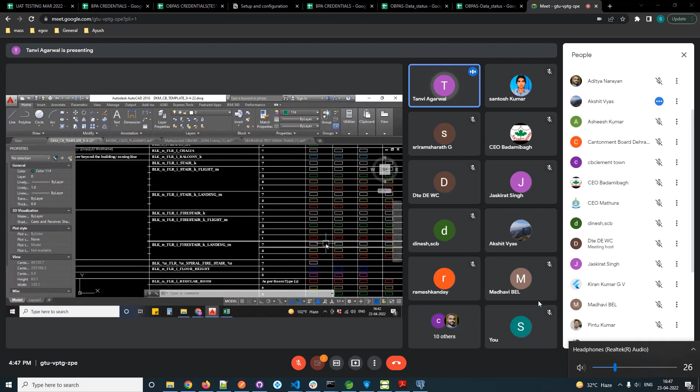ठीक है सर? अच्छा, हमने जो फायर स्टेयरकेस से मैच करनी है अपनी लेयर, हाँ फायर स्टेयरकेस वाली लेयर से मैच करेंगे, अगर आपके सीबी ने फायर स्टेयरकेस मैंडेटरी किया है तो। मैंने नहीं, उसमें ओब्लिक करके है ना, जनरल स्टेयरकेस ओब्लिक फायर स्टेयरकेस। ठीक है ओके मैम, तो ये उसी लेयर में बनाएंगे, जो भी आपके केस में एप्लीकेबल है उसके लिए सारी लेयर्स बनाई हुई है, जनरल स्टेयरकेस के लिए भी और फायर स्टेयरकेस के लिए भी। तो आप फायर स्टेयरकेस वाली लेयर्स यूज करेंगे अगर ये एरर दे रहा है आपका। अच्छा, अभी एरर हमें फायर स्टेयरकेस का, तो हमने ये फायर स्टेयर्स वाली लेयर यूज करनी है। हाँ जी। ठीक है मैम।

अब जैसे प्लॉट बाउंड्री डिटेल नॉट प्रोवाइडेड, ये नेक्स्ट ऑब्जर्वेशन है। ये भी आप खासियोल का बता रहे हैं ना?